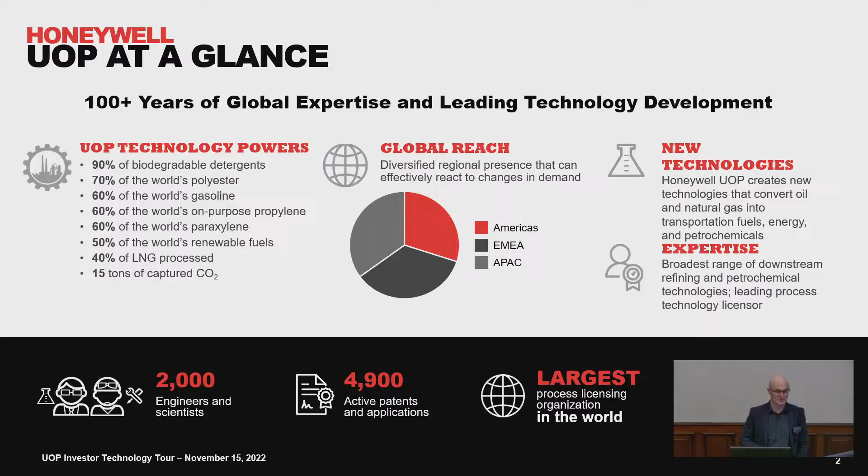Okay. Just as a quick introduction, Honeywell, we're a rather large company. You probably know us because you've probably got a thermostat on your wall that says Honeywell on it. We're a big building technologies company. We're also a big aerospace company. In fact, market capitalization of our aerospace business is bigger than Boeing. So Honeywell is a large company, 100,000 employee company.

What you probably don't know is that Honeywell owns the world's largest process technology licensor, which is UOP, Universal Oil Products. I don't know if it's an urban myth, but I'm told that you can't fill up your car with petrol or diesel without paying a royalty to UOP. We basically invented refining processes and petrochemical processes.

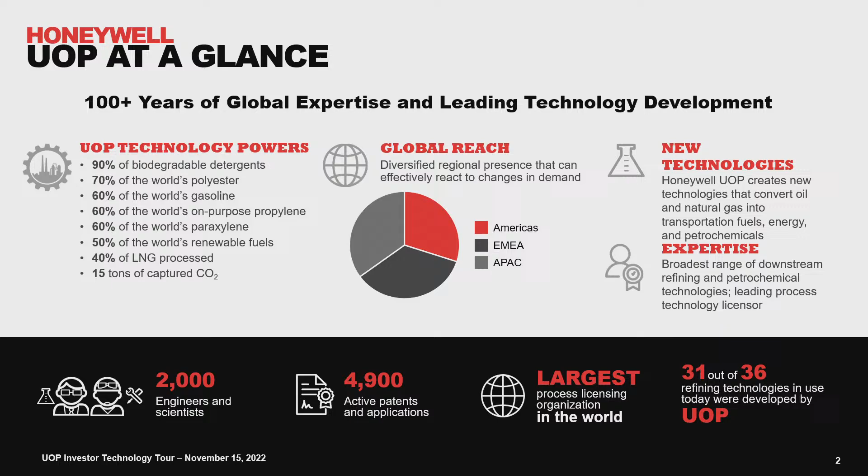And if you go to look at any gas processing scheme, our gas processing technologies will probably be in there somewhere. Gas sweetening, dehydration, all of these things in the oil and gas business, we are now applying them to the energy transition, which is what this slide says. So we've, like everybody else, got a group called Sustainable Technology Solutions within UOP.

So those mature technologies in oil and gas and petrochemical processing, we are now deploying them in the fields of energy transition. So whether that's renewable fuels and SAF and renewable diesel, whether it's recycling plastics to make polymer grade feedstock for making ethylene, polyethylene and these kind of things, or hydrogen and carbon capture, what we're doing is taking these mature technologies and applying them to the energy transition. Energy storage is also in there with long duration flow battery technology for energy storage.

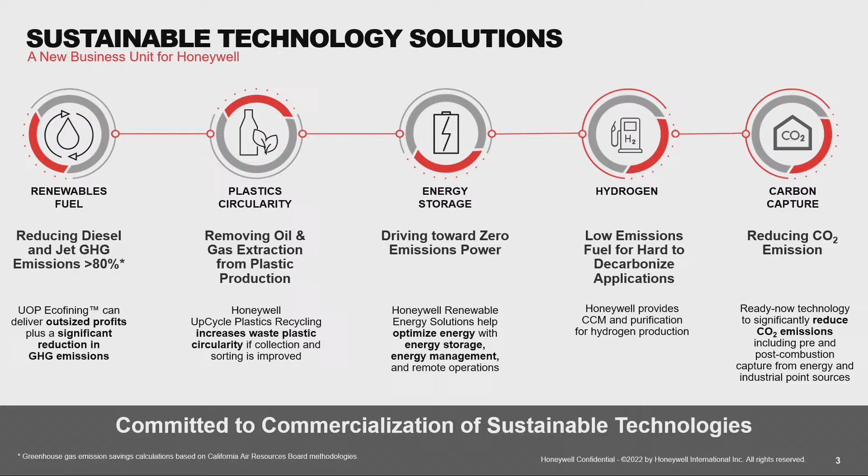But today I'm going to talk about carbon capture, both from hard to abate industries perspective and also as it relates to hydrogen production. Off we go. So, carbon capture technologies. Honeywell UOP, we can boast the whole range of carbon capture technologies. Some companies have a particular type of technology, we have a whole suite. So what does that mean?

We have chemical solvents, physical solvents, adsorbents, and cryogenics and membranes, the whole suite, and all commercially proven, commercially deployed technologies. These aren't new technologies that are low technology readiness level, they're all mature. Apart from one, I should say, this is the advanced solvent for carbon capture. It's a new post-combustion amine solvent.

The reason being, if you've got a flue gas with lots of oxygen in there, the old amines that are used for gas sweetening in gas plants, they're not resistant to the oxidative conditions you'll find in flue gases. So the new advanced solvent for carbon capture is a new type of solvent. So that's a new process that we're commercializing. Everything else here is proven.

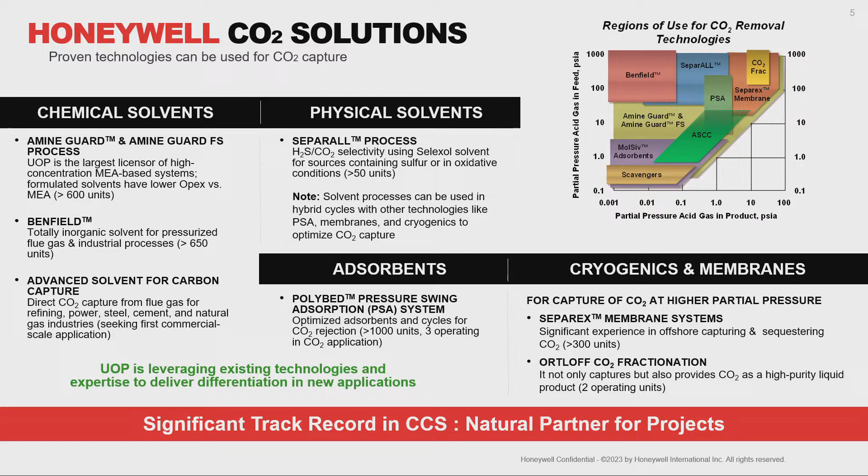Lot to take in here, and you can see this at your leisure afterwards, but a whole suite of technologies for carbon capture. So, just looking at typical flue gases, let's say. Looking on the right-hand axis here, starting off at low percentage CO2, like 3 or 4% you'll get out of a gas-fired combined cycle gas turbine plant. And then you might increase that percentage going up to 60, 70, 80% if you've got a cement plant with

an oxy-fuel kiln. So, depending on which kind of process you've got, we're seeing that our ASCC, Advanced Solvent Carbon Capture, post-combustion amine solvent, at the lower levels, that amine solvent is the best fit. And then when you get up to higher levels, it starts to be on the cusp of the technologies, where we have a PSA and cryogenics. The PSA is like bulk removal of CO2, gets you from like 20% to 50% CO2 before you cryogenically fractionate it to get pure CO2. And then when you get up to above 50%, it goes to cryogenic only.

So these are the kind of analyses we're doing. We're talking to a lot of customers, particularly in cement and steel, where they've got these kind of 20, 25% CO2 flue gas streams. And that's where we're kind of differentiated as Honeywell UOP. We can offer both technologies. We can look at which technology works for that customer. What utilities have they got? And these technologies have got different issues with them.

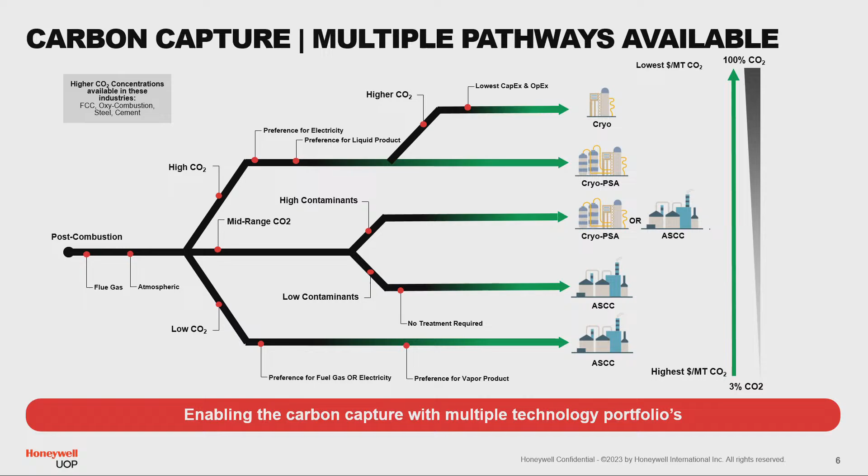In terms of references, it's always important that we're not just kind of dreaming here. These are real technologies and real deployment cases. The box there on the top right, the black box, shows some of the projects we've done. Just as a bit of a brag, and just to set the scene, about 40 million tonnes per annum of CO2 is captured around the world at the moment, mostly because it's for enhanced oil recovery. Nobody's ever wanted to capture CO2 before for the sake of saving the world because it's an inconvenience, it's a waste product.

So most of the projects that exist in black dots, enhanced oil recovery typically, or you're just taking CO2 out of a gas stream and you just want to inject it back into the reservoir. So we've got a lot of projects around the world at the moment. We're capturing over 15 million tonnes of the 40 million tonnes being captured. The recent awards, this is moving a little bit different now. We're getting our new amine solvent. It's not commercially deployed, the amine solvent for carbon capture for flue gases. But we're starting to see projects moving into the front-end engineering phase. So

I'll talk about some of the projects in a bit more detail, but there's coal-fired power plants in the US. Obviously not in the UK here now because they've all been decommissioned, but in the US there's some big coal-fired power plants. Duke Energy is a US Department of Energy funded project, 3.6 million tonne per annum CO2 capture. So we're doing the FEED with our amine solvent. And interestingly, that plant is going to be converted to gas-fired. So we've also got to design it with a future different composition in mind.

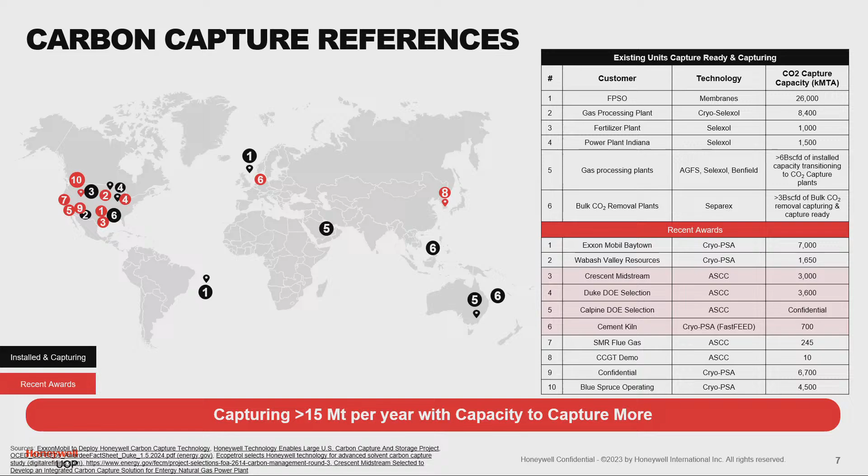You'll get a cement plant, maybe 100 million or 200 million. Honestly, I don't know. I'm not a cement guy. But the carbon capture unit for a million ton per annum CO2 emission cement plant, you're talking hundreds of millions. So this is the magnitude of the industry we're talking about. Very expensive. But this is what we're doing. We've won a project in cement for cryogenic capture and for post-combustion in different services in coal-fired and gas-fired power plants.

The amine process. So I don't think there's too many process engineers here, but what I'm just going to say is this is a typical amine solvent plant. And what we do here is use this advanced solvent that we've developed in conjunction with the University of Texas. And basically what it does is it minimizes the amount of steam required to regenerate the solvent.

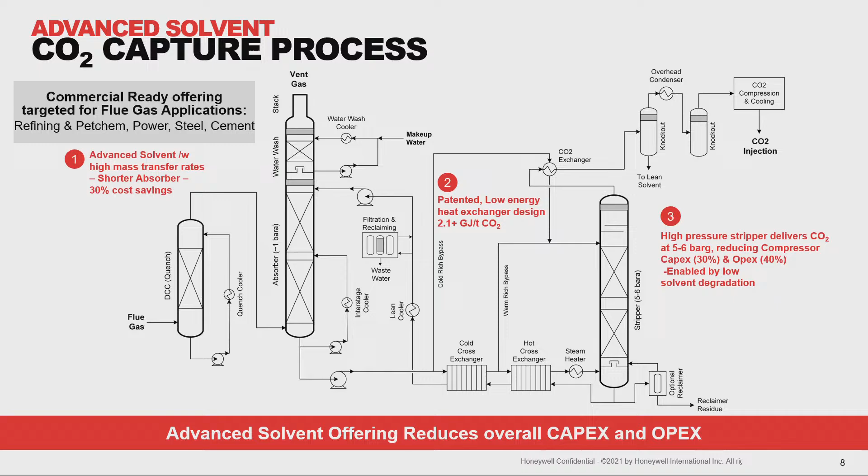How a solvent process works is basically you cool it down, you put it through an absorber. This amine solvent absorbs CO2. You get a rich solvent that goes through a bunch of heat exchangers. It then goes through to the regeneration column. We strip out that CO2 from the rich solvent. You need a lot of heat, a lot of steam, and then we export that CO2. And our process is particularly good because we minimize the amount of heat needed and we export it at 5-6 bar pressure CO2. So we know that this is a pretty competitive amine solvent technology.

We also have an all-electric design. So when you don't have a source of heat, and let me give you an example. The world's first cement plant carbon capture unit is being deployed at Heidelberg Materials Brevik plant in Norway. But that's only capturing half of the CO2 of the cement plant. And why? Because they haven't got the heat available in the process. So what we're looking at now is all-electric amine solvent plants.

So what we do is a couple of things. If you look at our stripper there on the right-hand side, we compress that CO2 being exported, and the heat of compression, we take that heat and use it to regenerate the solvent, take out CO2 from the solvent.

And also, we have a heat pump, so your low-grade heat from your cement process or whatever process you have, we take that heat, and with the coefficient of performance of that refrigerant in the heat pump, we can get some useful heat to regenerate the solvent. We don't create steam, should I say, we get heat using the refrigerant. So it's a non-steam process. So what we're doing here is an all-electric design to regenerate the solvent.

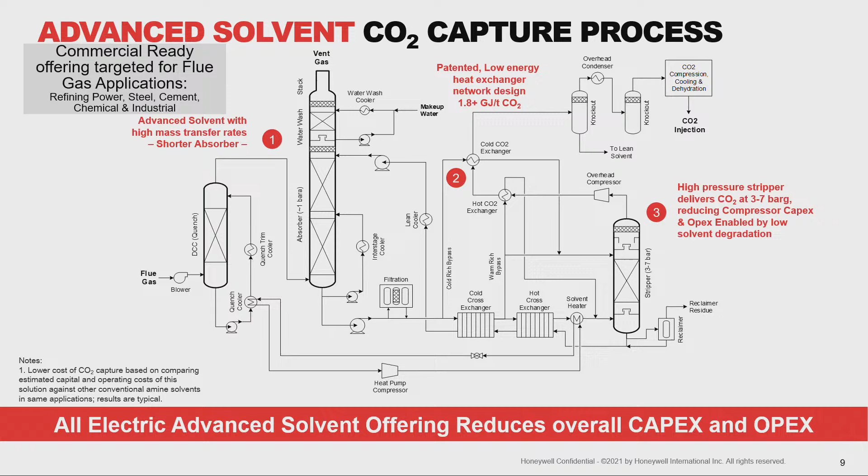I won't dwell on this slide. You can read this slide at your leisure, but this is the advantages of our amine technology to remove CO2 from flue gases. It's high-pressure CO2 export, low solvent degradation, low demand on the heat needed for solvent regeneration.

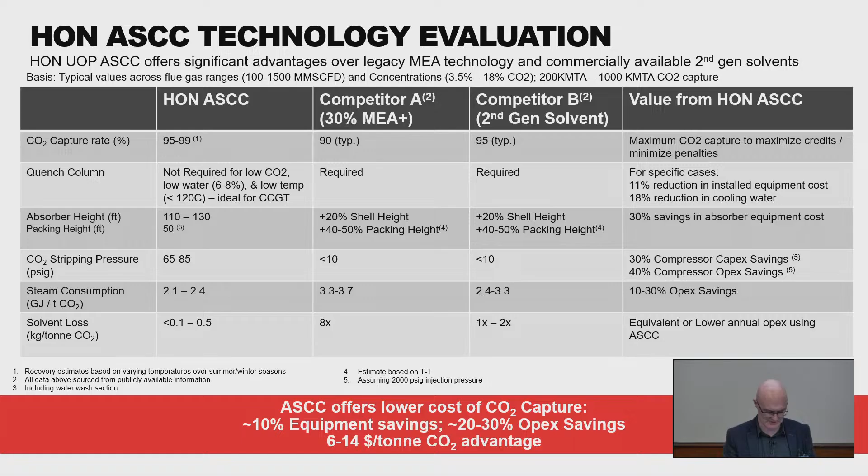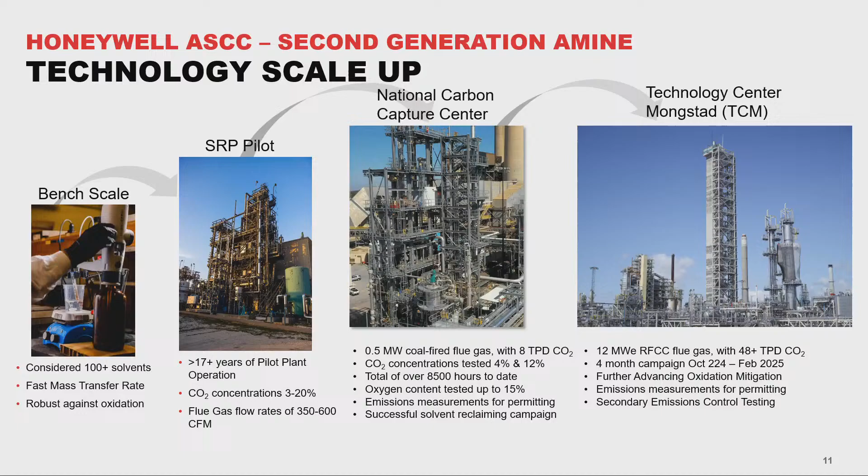And we've tested it heavily, so those in the carbon capture business will know that there's something called Technology Centre Mongstad. It's a test centre in Norway that's capturing CO2. But before that, we started life in University of Texas, where the separations research program looked at pilot plants. So this is where the technology for post-combustion amine solvents started. We've then acquired this technology.

We've tested it at the NCCC in America. This is in Alabama. It's a coal-fired power plant. We take a slipstream off a coal-fired power plant, and we've tested this amine solvent there over 3 test campaigns. And what it's done is it's proved up our estimate of the performance of this solvent.

And we've also tested it most recently at Technology Centre Mongstad. So this is in Norway. It's an oil refinery. I was there with SSE, Scottish and Southern Electric, last month, and EDF of France, hosting them around this site. So what we've been doing there is it takes some flue gases out of this refinery, and using this amine solvent that we have, it regenerates and emits flue gases which are cleaned up and captures the CO2 for sequestration. About 75,000 tonnes per annum CO2. So this is like the gold standard of CO2 capture testing in the world, TCM.

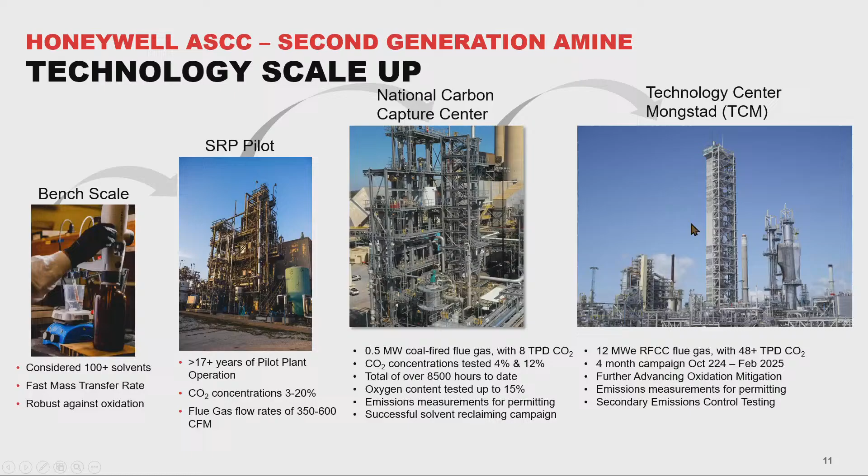So we know it's a very mature technology given our testing, and we've tested it at all sorts of compositions of CO2, because sometimes you have low percentage CO2 in a power plant, sometimes you have high percentage CO2 in a steel plant or a cement plant. You get up to like 20+% CO2. So in this testing campaign, we've done some recycle on the flue gas to make sure we've got up to 20% plus CO2 and see how the technology performs when you've got a higher percentage of CO2.

And also, this is the important thing, we've also measured the emissions from our absorber. Your treated flue gas comes out the absorber, make sure there's no contaminants, no amines, no nitrosamines, no ammonia, no aldehydes. So we've tested all of that. So it's basically proven. It's clean, treated flue gas that you get out of this process.

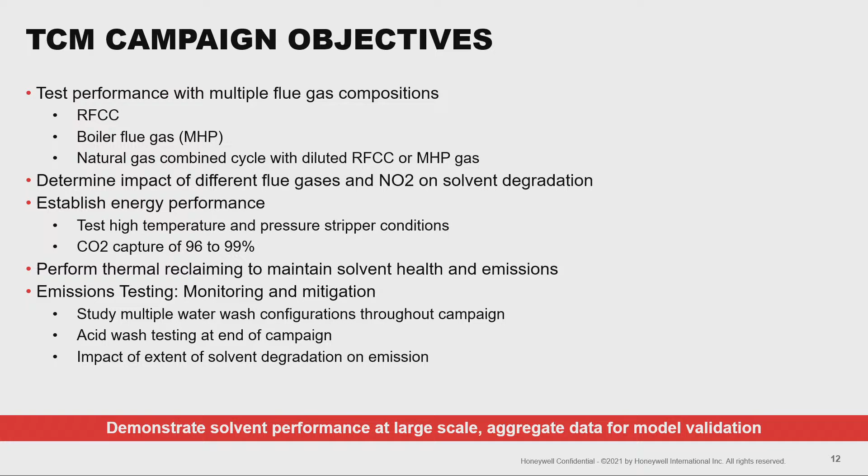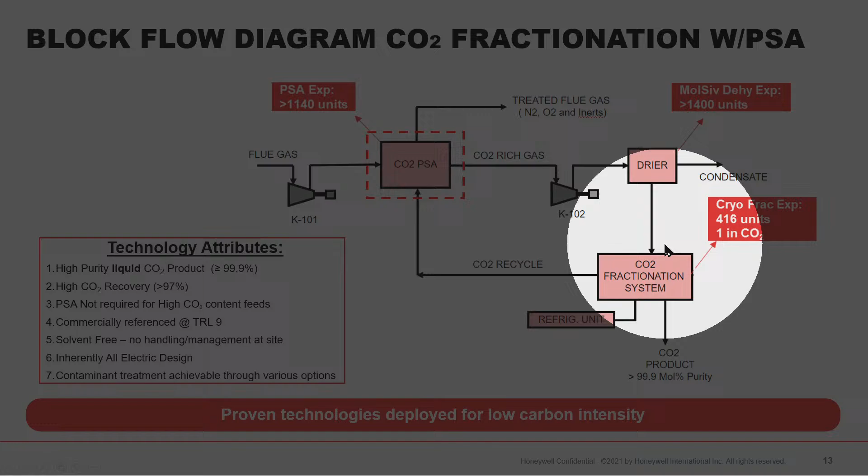Now, TRL, all of this is 9. We've got PSAs in operation, taking CO2 out of streams. We've got 1,400 plus dehydration units. And we've got hundreds of cryogenic fractionation units, including one for CO2 service. So all in all, we say this is TRL 9, piecemeal, but all together, and in cement service, never been done. So this is the challenge we have in the carbon capture world at the moment. It's about pulling all of these technologies together that are proven, but in a different service.

And I've just come off the phone, by the way. This technology has been recommended for some EU Innovation Fund applications for cement plants and others, given the relatively low kilowatt-hour per tonne duty for CO2 removal. And we've also got a project in Germany for a cement plant where this technology is being designed and studied.

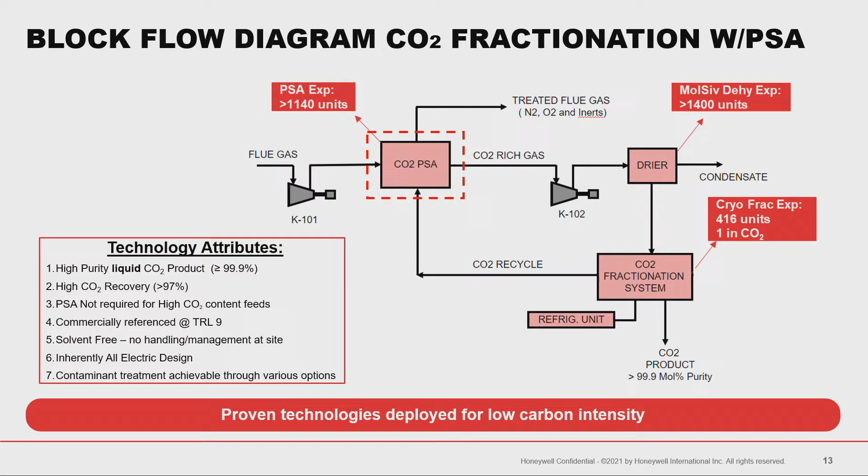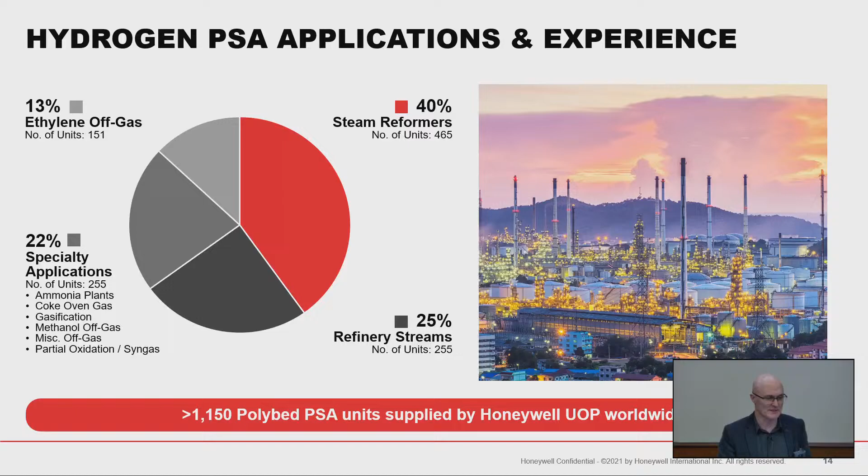PSAs, as I say, we've got a lot of experience, typically in hydrogen purification, but also in CO2 removal. I'll skip over that slide. But in terms of cryogenic capture of CO2 from feedstocks, hundreds of references in gas processing. As I say, typically it's coming from the fracking world in the US, where NGL, LPG fractionation from gas streams is quite normal.

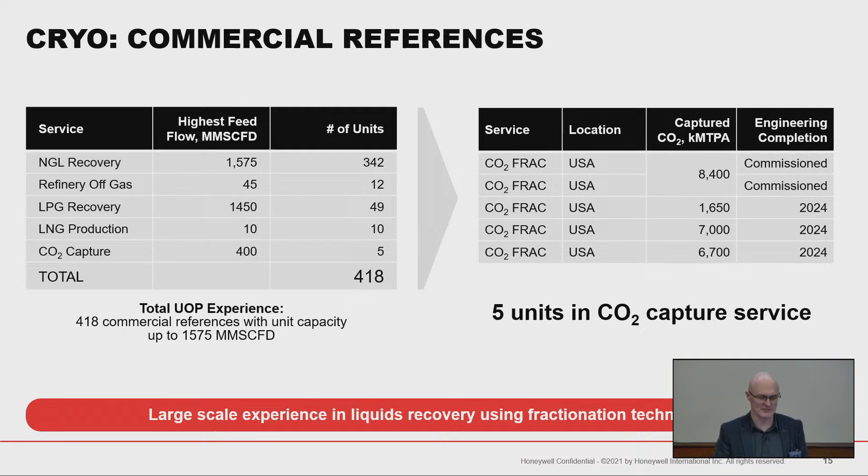And this is the biggest project. This is taking CO2 out of a gas stream, a methane gas stream with about 65% CO2. What we do is take that CO2 out of the gas stream by the cryogenic fractionation process. So this is a 2-train system you can see here in Texas. Why on earth did they do this 10, 15 years ago? Well, it was enhanced oil recovery. That's what they used to do in those days.

First of all, you want the gas, it's a useful product, and you've got to get the CO2 out of it. And then they use the CO2 injected to go back into the reservoir to get more oil and gas out of the ground, which has got a kind of perversion around it, of course, these days. So enhanced oil recovery isn't so common these days. We're doing this carbon capture process to make sure we prevent emissions.

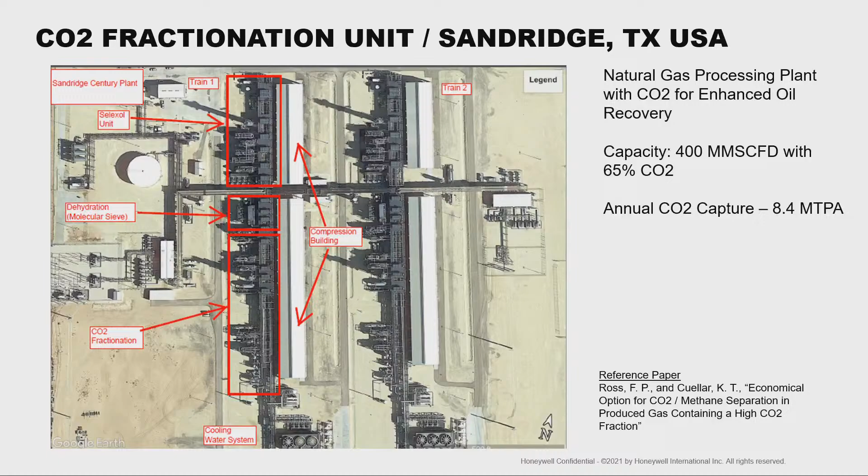And then just comparing for these flue gas applications, fractionation versus amines, there's a kind of trade-off. This is a very crude analogy. Maybe about 20% CO2 might be an indicative crossover. But what you see here, the red line is an amine solvent plant. So as the concentration of CO2 increases, a little bit cheaper cost per ton. But what you see here for cryogenic fractionation of CO2 massively drops.

Why is that? Well, compressing a flue gas is massively expensive. And if you've got largely inert gases and a small percentage of CO2, you're spending a lot of effort compressing inert gases, no interest. So what you want to do is get your CO2 percentage quite high, and then it becomes really quite economical. So what we're saying is in the cement world and the steel world, we're getting to like 20, 25, maybe even 30% CO2, and then this cryogenic process becomes really quite interesting to remove CO2, quite economic.

And there's also considerations, like I said before, you've got to look at contaminants. Some processes are better for contaminants. You've got to look at utilities available. Do you have heat and steam for an amine process? How much plot space do you have? Part of the problem we've got is a lot of projects for existing facilities, existing power plant, existing cement plant. They weren't built with plot space in mind for a new carbon capture unit.

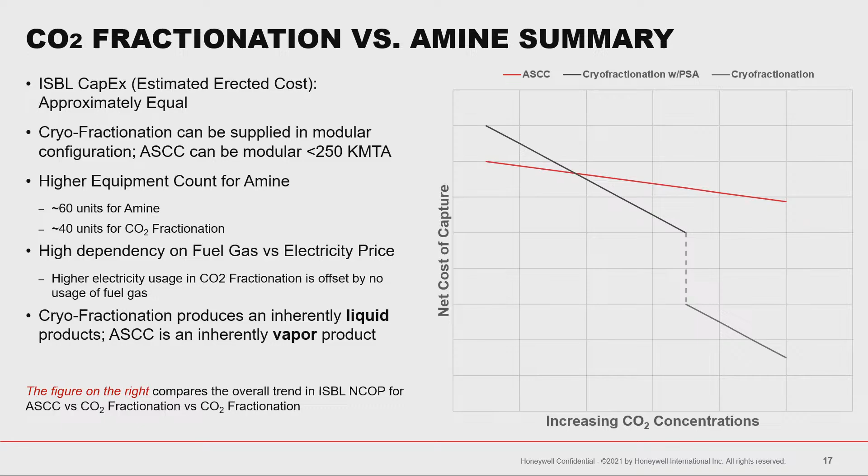Excuse me. So, yeah, we've talked about flue gases, carbon capture, general application. I'm now just going to talk a little bit about decarbonising hydrogen production. There's a lot of talk about electrolyzers and green hydrogen production. It's very expensive. We are looking, by the way, at green hydrogen.

We have membranes. I talked about membranes for carbon capture. We have membranes that we're putting into electrolyzers, where you get green electricity, wind turbines, solar, whatever, and you drive the electrolyzers using that green power, and then you can make green hydrogen, but it's very expensive.

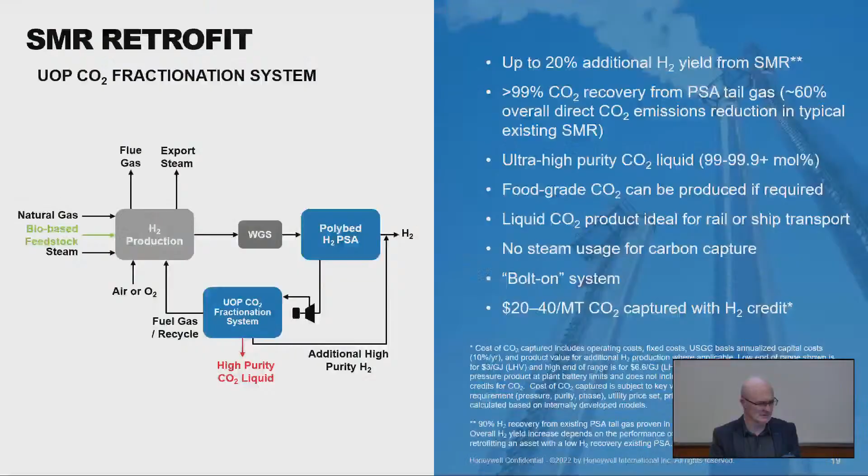Blue hydrogen. So just down the road here, Teesside, you've got BP looking at a blue hydrogen project. So you've got all this methane gas, you reform it, and you capture the CO2. So that's what I'm going to talk about here. Now, just some metrics. Cement industry, 7% of world CO2. So there are some big emitters. Hydrogen, massive emitter of CO2.

Now, why are we making hydrogen at the moment? If you work in refining, you need hydrogen for petrochemicals and refining, for hydrotreating, and for various chemical processes. And you need pure hydrogen. So how is that achieved? Typically, it's by reforming, steam methane reformer, SMR. And when you make a kilogram of hydrogen, you make 10 kilograms of CO2. So in the world of producing hydrogen, for various sources, you're making a lot of CO2. So grey hydrogen, 10 kilograms of CO2 per kilogram of hydrogen. It's a lot of hydrogen, a lot of CO2.

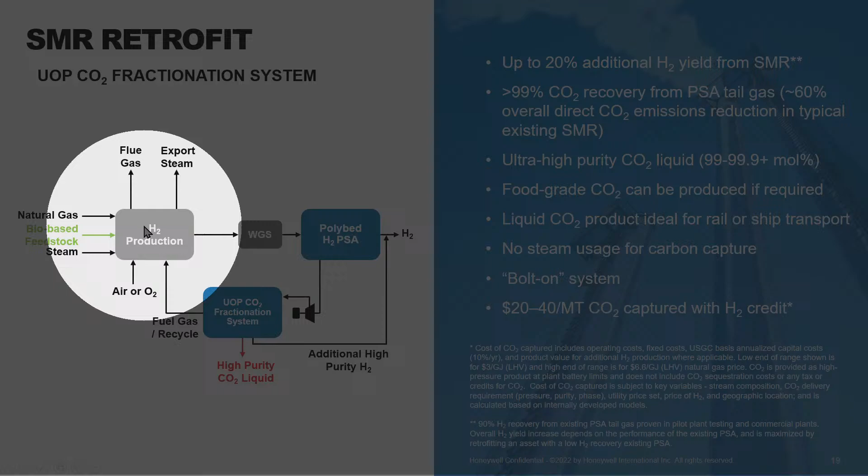So what we're doing is taking a typical process in an SMR. So this is an SMR, water gas shift, and then what you do is put this syngas through a hydrogen PSA, and off you go, you make hydrogen. And in the past, the tail gas from the PSA goes through to the steam methane reformer as the fuel source, and then you get a flue gas there, which gives you 10 kilograms of CO2 per kilogram of hydrogen.

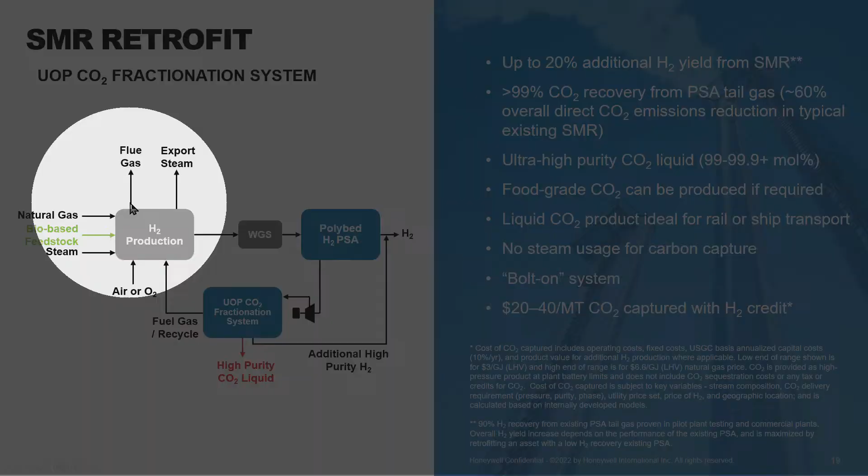So what we're doing now is we're looking to put our fractionation system to remove CO2 from hydrogen production. What you get out of this PSA here is a combination of carbon monoxide, carbon dioxide, hydrogen, methane. And we're using this fractionation system to take away the CO2. Actually there's a bit of hydrogen here, and we recycle that hydrogen back to product, so you recover more hydrogen out of this process, and then the rest you take through the tail gas to the reformer fuel source, and then you get your flue gas.

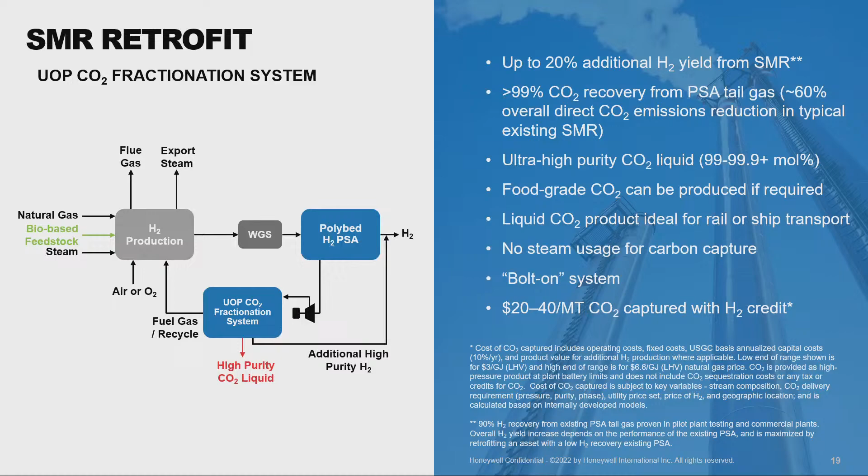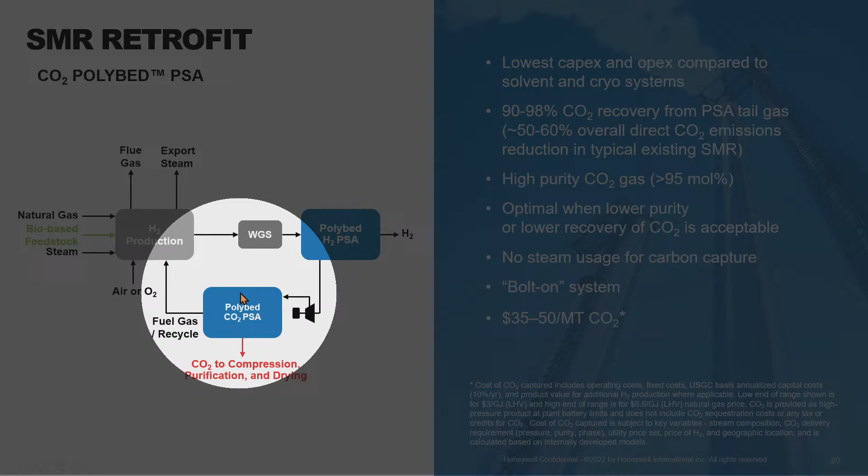So in hydrogen production, we're looking at our cryogenic capture system to take CO2 out of hydrogen production. We're also looking at our PSA system to do exactly the same. This is a cheaper way of doing it, but PSAs give less purity of CO2 product, and less recovery. So you're trying to capture as much CO2 as you can. So this is a cheaper but less pure way of capturing CO2 out of hydrogen production.

And then finally, and this is what most folks are doing at the moment, is pre-combustion amine solvent. If you've got some steam available, some heat available, you can use that to regenerate that solvent and capture CO2. So there's 3 ways there using our technologies to decarbonise hydrogen production. What I haven't said is that in a steam methane reformer making hydrogen, about 60% of the CO2 is in this pre-combustion arena, and about 40% goes up the stack in the flue gas. So all of these 3 things capture your 60%, but they don't capture the 40%.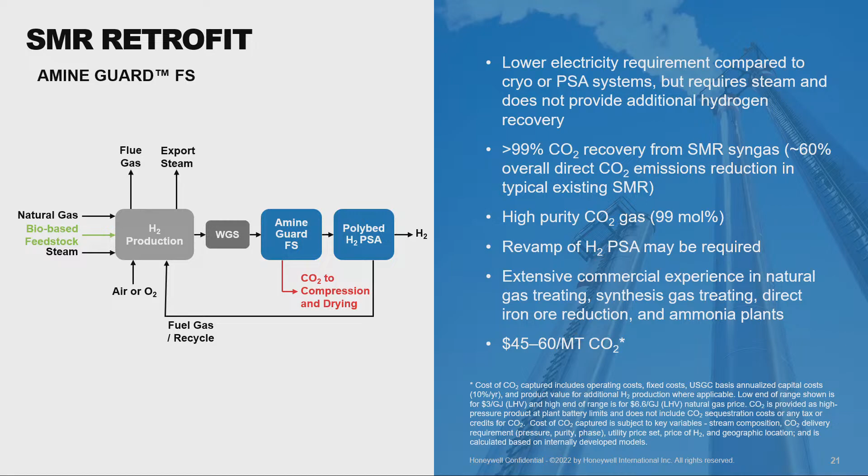So what we're doing here is putting our post-combustion amine solvent on the back. We're talking to refiners and steam methane reformer players to decarbonise hydrogen production using a combination of our carbon capture technologies. A reminder, green hydrogen's expensive, blue hydrogen's much cheaper, but you need carbon capture. And that's where you need the transportation and storage systems, the Northern Endurance Partnership down the road here, taking the CO2 offshore, or in the HyNet area in Liverpool Bay, taking the CO2 offshore near Stanlow. So blue hydrogen projects are economically viable if you've got government policy incentivising the CO2 capture, and off-takers of clean hydrogen willing to pay that premium.

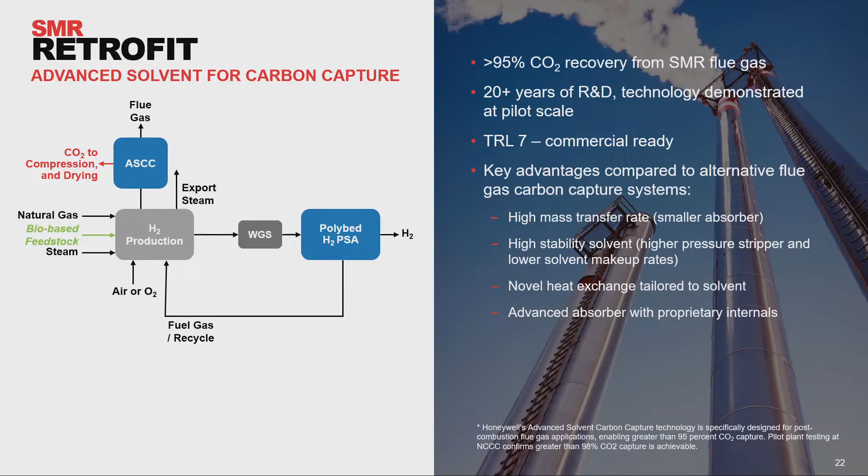And then finally, the last few slides, there's a lot of information I'm throwing at you here. Autothermal reformers. These are typically being looked at now for large hydrogen projects. So Teesside here, BP are looking at an ATR project with Johnson Matthey technology. They're the autothermal reformer technology player. Same for the HyNet area. It's called HPP1 for Essar Energy Transition. There's a couple of big projects.

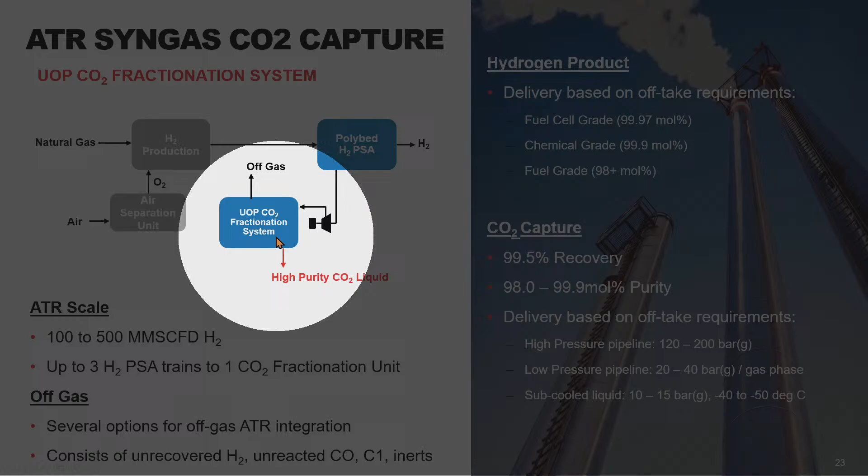Kellas Midstream, just down the road, are looking at a blue hydrogen project. So there's a bunch of blue hydrogen projects using this ATR technology. And what our Honeywell UOP technology can do is decarbonise that. We like to think we're going to have a PSA system in there to purify the hydrogen, and we're offering our cryogenic fractionation system to take out the CO2.

And there's three more slides to go. Hydrogen PSA for hydrogen purification. And we can give you fuel cell grade, fuel grade hydrogen, or chemical grade hydrogen for fuel cells. All depends what kind of hydrogen product you want. Is it like 99.97% hydrogen, or is it 99.99?

So these are the kind of things we're helping with our customers, looking at their hydrogen offtake requirements, or maybe it's got multiple offtake requirements, different specs of hydrogen. And we're putting it through our cryogenic fractionation system to capture the CO2, and then recycling it back to the autothermal reformer, so you've not got any CO2 emissions. So this is a recycle process which is really decarbonising hydrogen production.

You can see here 0.1 to 0.3 kilograms of CO2 per kilogram of hydrogen. Remember at the start I said typical hydrogen production is 10 kilograms of CO2 per kilogram of hydrogen. So here you're talking about 0.1 to 0.3.

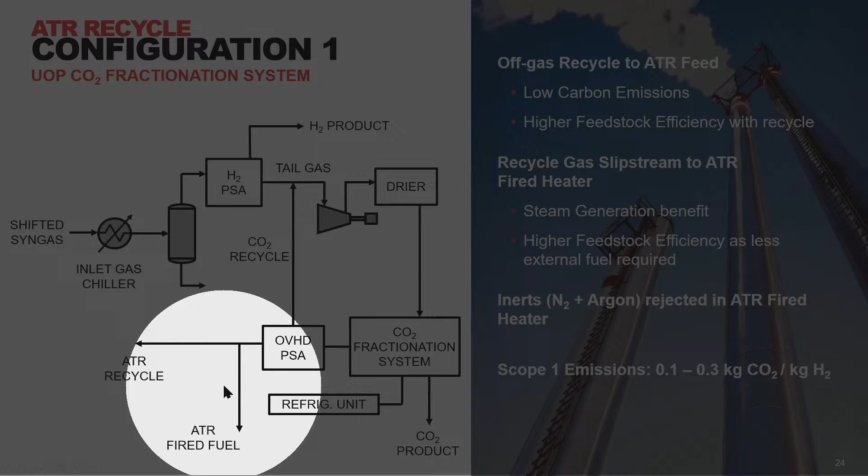One thing I should say is we need to take a little bit of a bleed off of this system here to stop the build-up of inert gases, because otherwise, with the recycle, inert gases will build up and build up. So there's a small bleed here that's the fired fuel to the autothermal reformer, and that gives you a very small carbon intensity because you've got a bit of carbon in there.

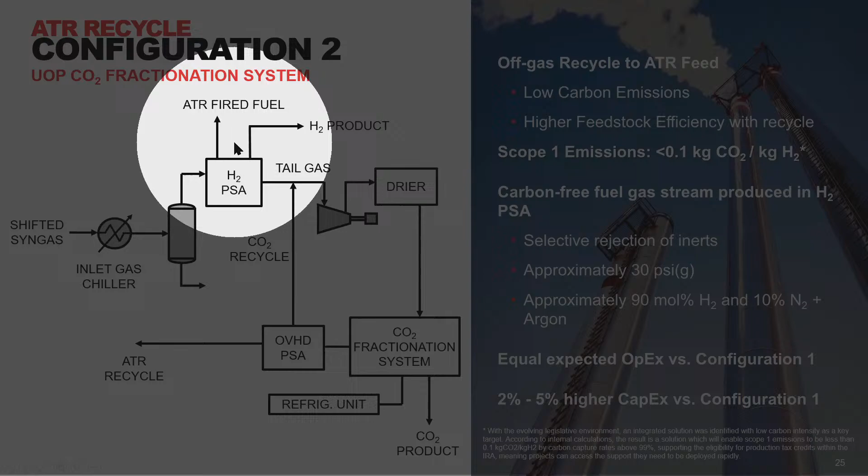And we also have a very advanced system here with a new patented technology which basically takes that bleed of inert gases and gives you effectively a decarbonized fuel supply to your autothermal reformer. So again, this is a recycle system making blue hydrogen, but with almost zero scope 1 emissions. You know, how much CO2 is being emitted? It's almost zero.

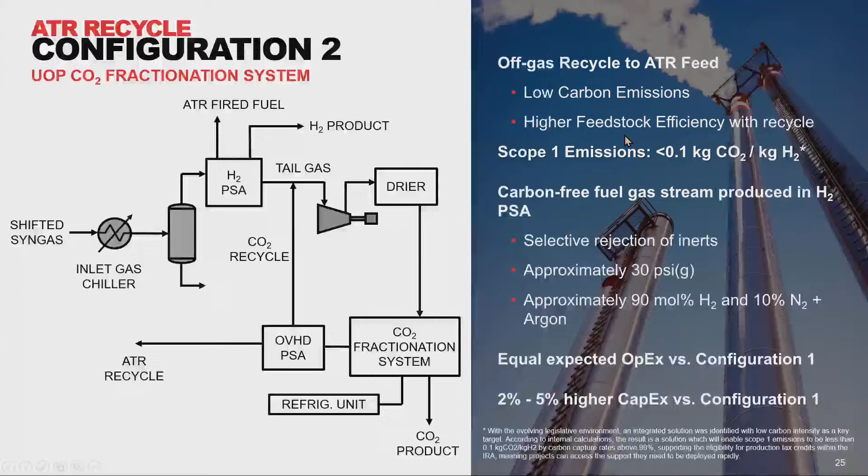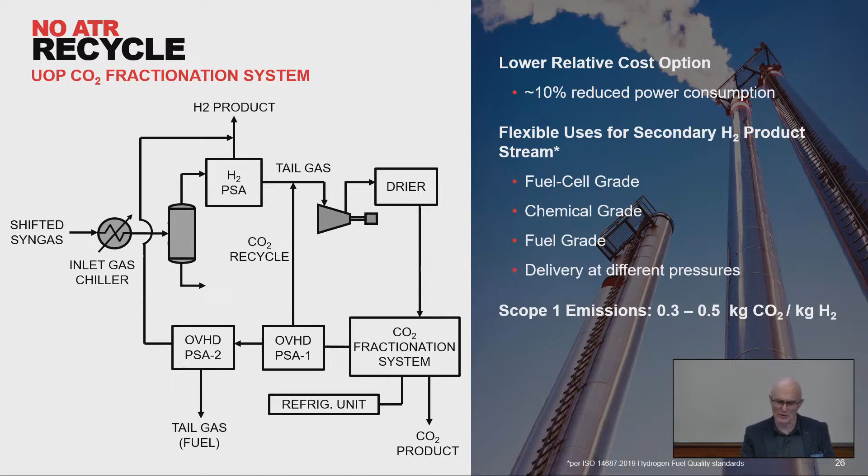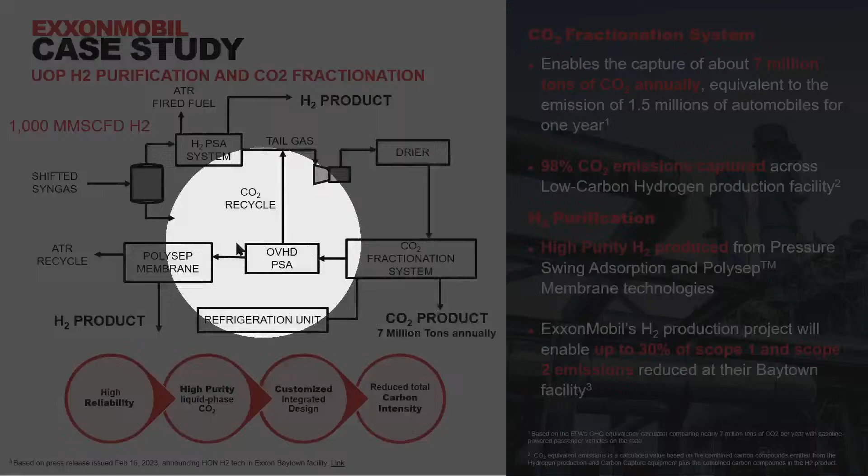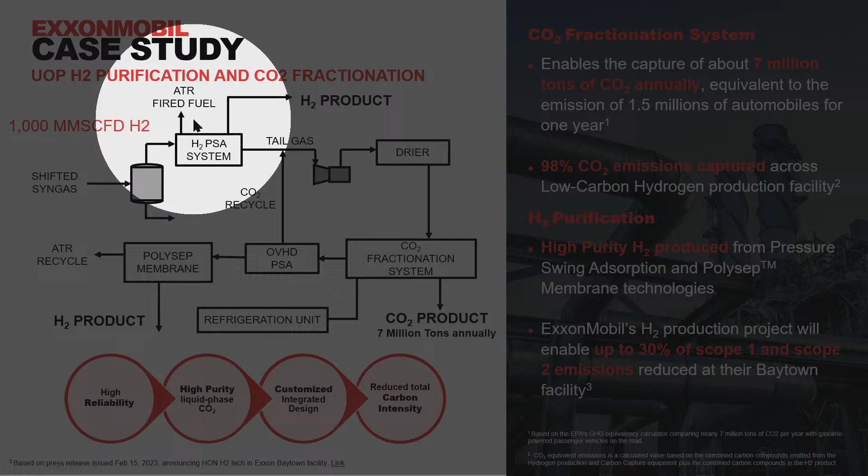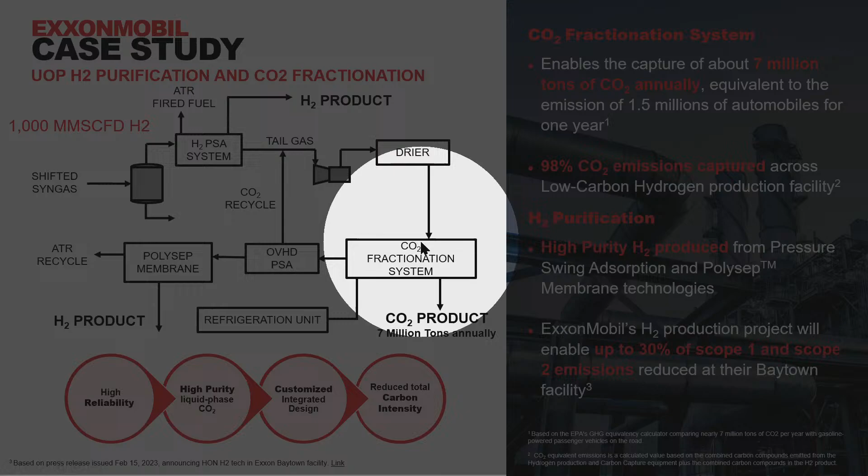It's got an autothermal reformer, which is upstream here. This is a Haldor Topsoe autothermal reformer. And what you do is once you've got that shifted syngas, you put it through our PSA for hydrogen purification and offtake. This little piece here I talked about bleeding off the inert gases and giving a decarbonized fuel source to the autothermal reformer. We've got our cryogenic CO2 fractionation system, giving you a high purity liquid CO2 product, and then taking it back through on a recycle.

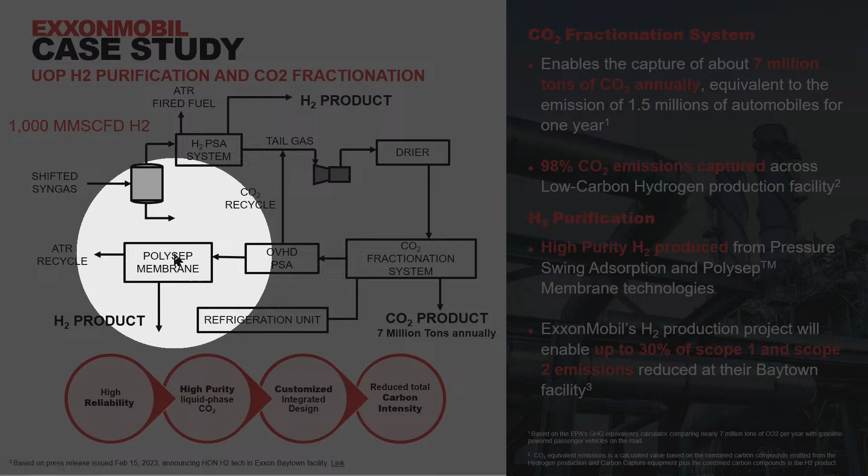We've also got membranes for hydrogen, so we're actually making the autothermal reformer a bit smaller here by taking off some lower purity hydrogen and decarbonizing ExxonMobil Baytown's refinery by giving them fuel grade hydrogen. So this is a real project. This is 7 million tons per annum of CO2 capture, about 1,000 million scuff per day hydrogen production. So massive hydrogen production plant.

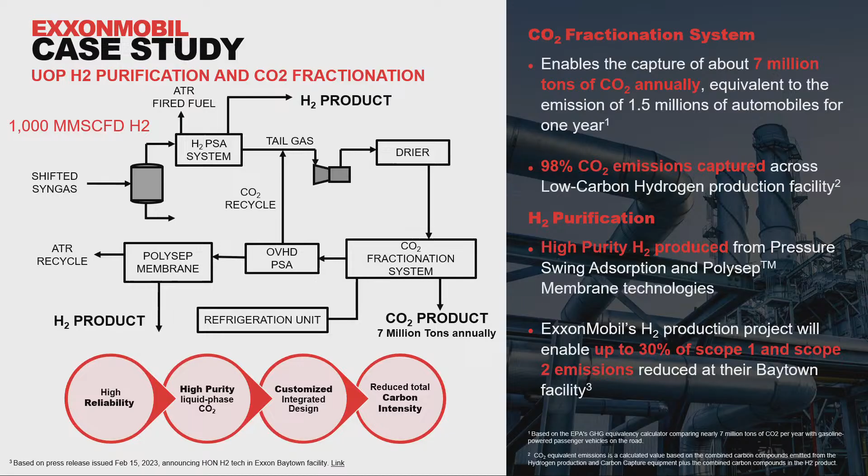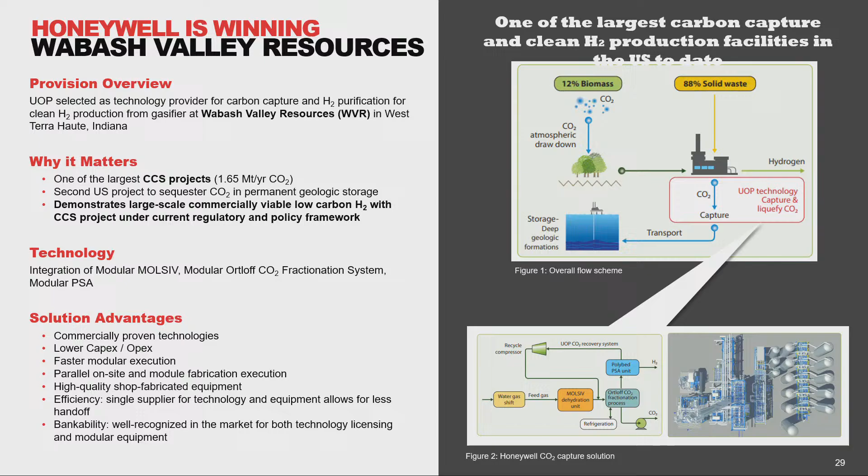So whether it's a coal-fired power plant, or a gas-fired power plant, or a cement plant, a steel plant, or just anything that burns hydrocarbons and emits CO2, we're talking to those emitters to try to help them meet those challenges. I think that's about it. I've covered a lot of ground here.

And it's 45 minutes, I think. We're perfectly engineered to schedule. Questions? Okay, here's your chance now. Ask the questions. There we are. Could you state your name and company you're with?

Hello, Ross Freeman from Hatch. Have you any experience of using this technology within the aluminium industry? That's a good question. No, but curiously, I did meet at a carbon capture conference an aluminium player in the Middle East. I think what they were trying to do actually was decarbonize their power supply.

I mean, for example, I'm talking in Africa at the moment to power players that want to decarbonize and then give clean power to mining, to aluminium companies. So Hatch is very prominent in that space, I recall. So yes, we are indirectly talking to some aluminium companies, and I think in the Middle East, I've handed over to my colleagues there that are talking to aluminium players there. In the UK, I don't think there are.